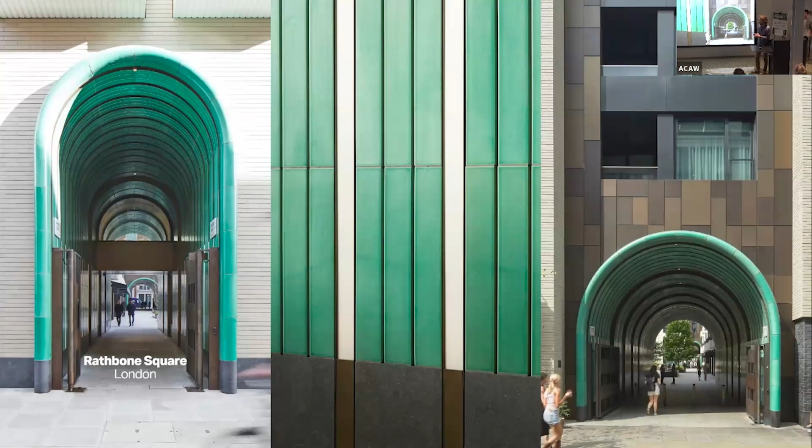The conversation with Boston Valley started a few years ago when we worked with them on a project in London. We've worked on a couple of projects with Boston Valley directly. This one is in central London, part of a multi-use scheme which is residential, called Rathbone Square. Boston Valley developed these amazing arches alongside our team in London. It's also part of the Facebook headquarters in London, an interesting mix of residential and office, based on a courtyard design, and the two tunnels are amazing public gateways into those spaces. It's a super popular lunchtime spot now, and everybody stops and takes Instagram photos.

On the other side of the world, we've also worked with them on a heritage refurbishment called Shell House, in Sydney, part of the wider Brookfield Place scheme which includes a tower, with a train station beneath. It's highly complicated - this was a facade retention scheme for the heritage asset, and the faience was where Boston Valley's expertise was brought on board. We've worked with them across the world, and it's nice to come here and see their facilities - that's been a great opportunity.

This is the crack team: myself, Jack, we've got Nick and Andrew from Make, and then we've also got Georgina and Luca from Arup. Georgina's here, but sadly Luca is not. We had a lot of fun.

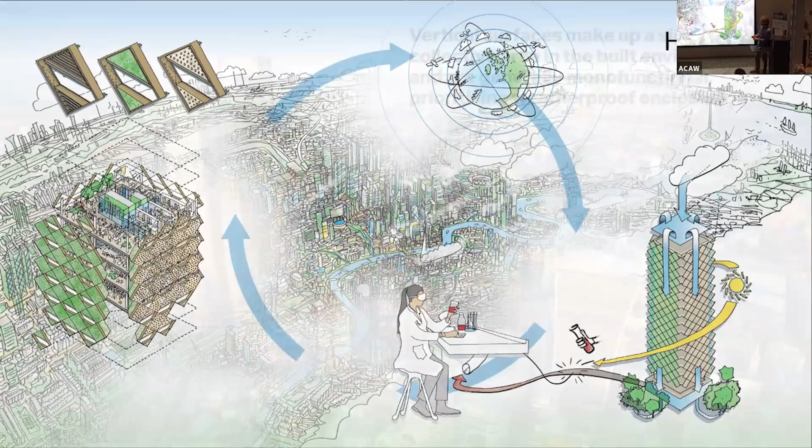As you've heard this afternoon, vertical surfaces make up the vast majority of our surface area in our cities - this is central London now. What if we could do something with those vertical glass and brick and all types of facades, and whether we could use that productively?

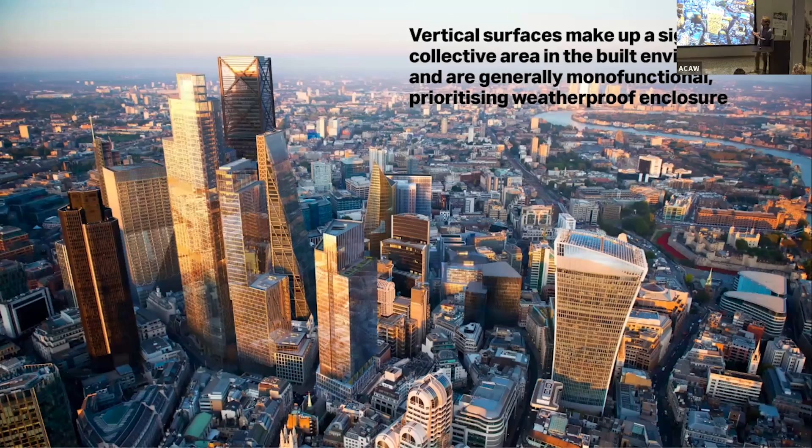On top of just gathering water, could those be elements that enhance growth? In the UK, we're having a lot of conversations about urban greening at the moment, and it's being encouraged - it's a planning policy where we have to hit a certain amount of greenery on facades now, essentially. So can we cross those two together, looking at water retention, which encourages growth?

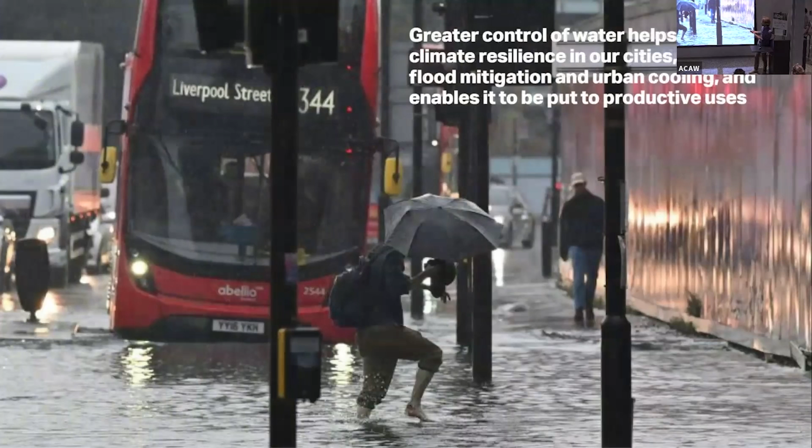This is just your normal Tuesday afternoon in central London at the moment - it's nice to be here. So it's basically, can we mitigate stormwater runoff to stop having our Tuesday afternoons like this?

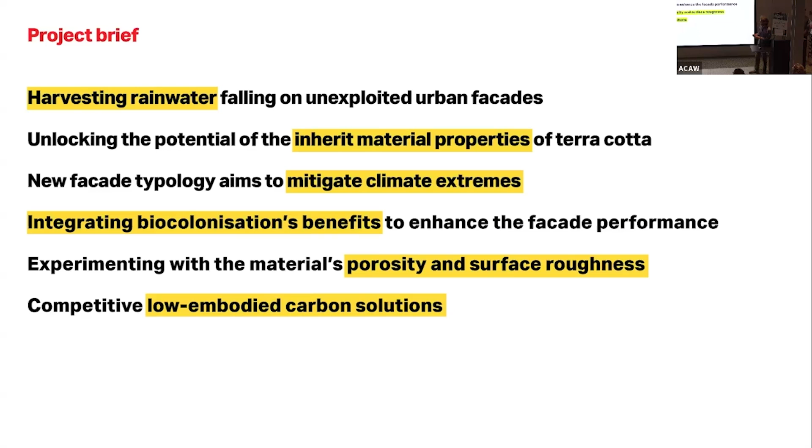The project brief we sent over to Boston Valley was basically: what can we develop that looks at harvesting the rainwater, maximizing the inherent properties of terracotta, whether that's using glazes or not using glazes, to create a new facade typology that can start to mitigate against some of these effects and passively encourage greening potentially - looking at porosity and glazing as a binary system, which you'll see develop.

Delving into the research now.

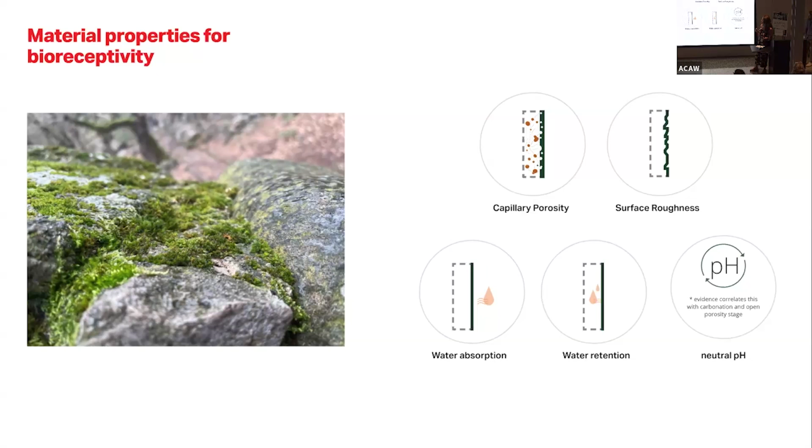While working on the hydroskin concept that we started with Make, we started delving into bioreceptive materials. For those who have never heard the term, it's the ability of materials to be colonized by microorganisms. How do we, as designers and architects, steer this biogrowth and control it? By engineering a set of material properties, we first need capillary porosity for the water to be absorbed and retained. We also need a neutral pH, which since terracotta is a natural material, we are good to go with. Our team also focused on the treatment of the texture and the surface roughness.

What helped me inspire Make was my personal research thesis at TU Delft not long ago, where I had the idea of creating porous glass through foaming, so that mosses and microorganisms could colonize it. The driving reason was to incorporate glass waste streams that are currently being landfilled. I created these samples, soaked them in water, dried them, checked their permeability, crushed them, and after leaving them at the Botanical Garden of TU Delft for even 6 weeks, I actually spotted life on them. That was one of the most exciting parts.

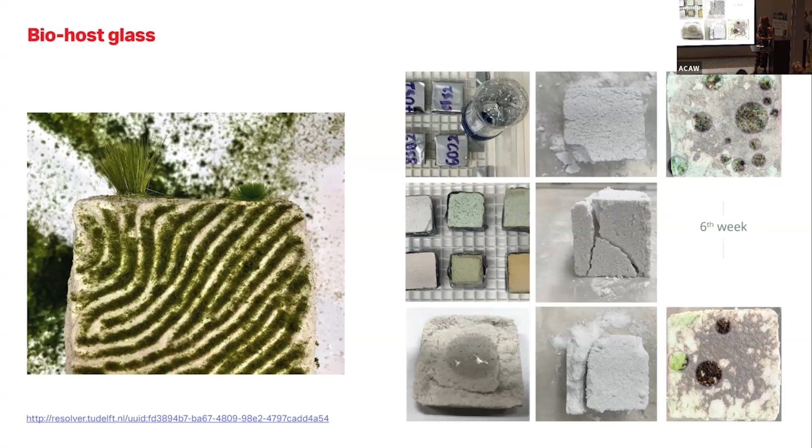That's how all this knowledge helped me when we sat down with Make and started asking ourselves: how much water can our facades capture? How can we answer that?

We set out a strategy of specific steps, first gathering weather data, the precipitation levels of each area, to know how much water falls on any location where our building is. Then we need the orientation of the surface of interest, which goes hand in hand with wind and radiation levels, because the prevalent wind falling onto the building surface actually has the force to change the rain trajectory and enable water to fall on our buildings.

Contrary to some people's belief, on vertical facades water doesn't fall from rain as much as when you're on the streets. We also need the radiation levels, because we need to answer how much solar exposure we get and what kind of microorganisms will eventually grow.

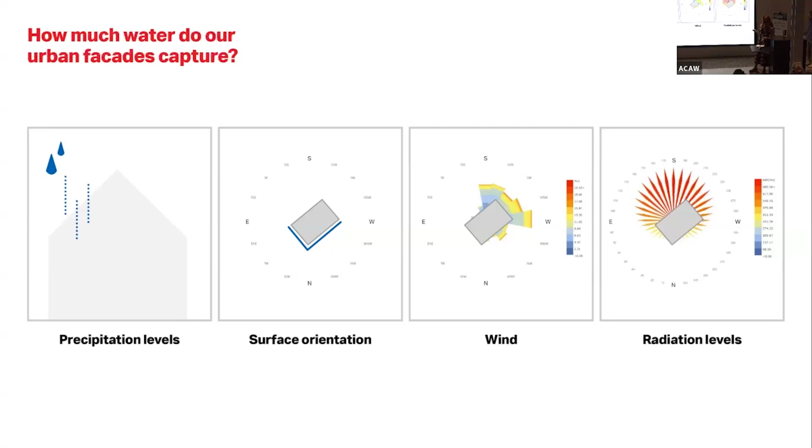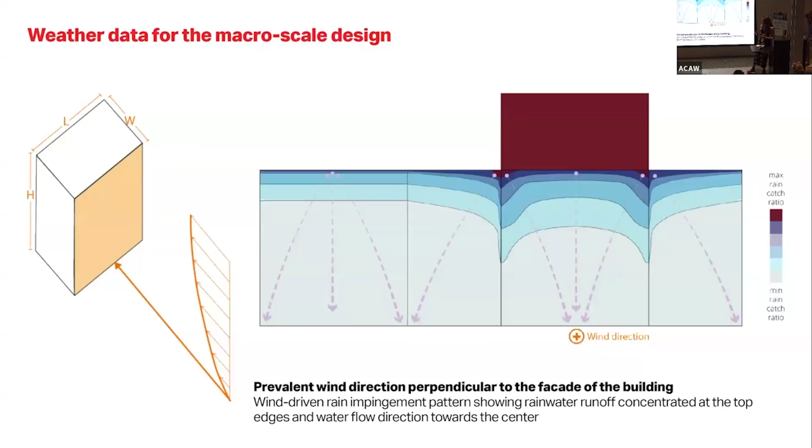This is another case where we have a more homogeneous pattern, because the wind falls on the main facade.

Combining this with previous research already done at TU Delft by Cassie, who explored bioreceptive concrete experimentally and did CFD analysis on horizontal microgrooves, we could tell which was the optimum design and optimum ratio of depth and height to get as much water absorbed and delay the water flow.

After all this, we arrived with certainty at a set of new design principles for bioreceptive materials. Primarily, we want the surface sculpted so there's continuous water flow. Then we have horizontal microgrooves, which are super important for microorganisms to anchor themselves and attach to the surface. Finally, we remove the fire skin of the terracotta to enable the inherent porosity of the material to absorb water.

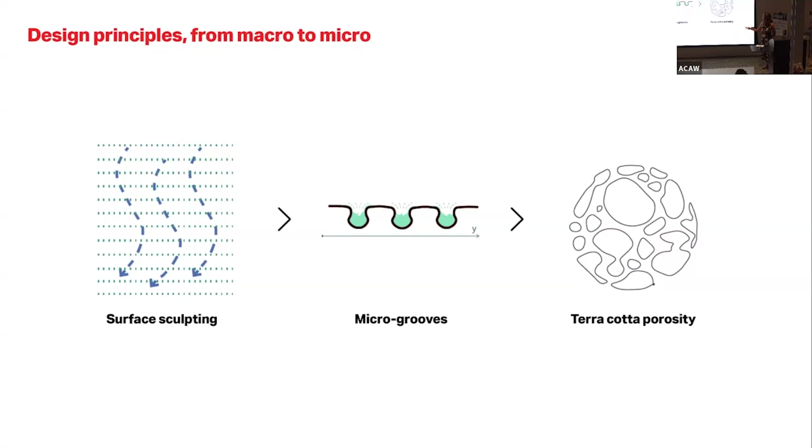And finally, I hand it over to Andrew. Thank you. Maybe stay away. I'm not going to.

Hi everyone. So we took all of that amazing research and started looking at how it could be translated into terracotta. Even from the earliest studies, we always wanted to look at something relevant to both new build and retrofit applications, so you're probably not going to hear too much from us about the substrate. That's intentional. At the heart of the form is this idea of controlling water, but we want to do that in a really beautiful way, and I don't just mean aesthetically.

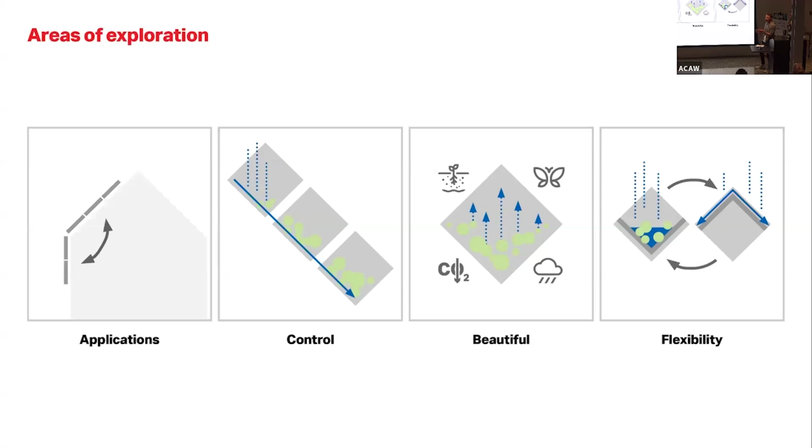We also want to make a positive contribution to the natural environment and also deliver something that's topologically optimized, so it's as low embodied carbon as possible. We're also really interested in scalability, so trying to minimize variation, but look at single elements that perhaps just by way of how they've been oriented can provide different functions, so inherent flexibility in that.

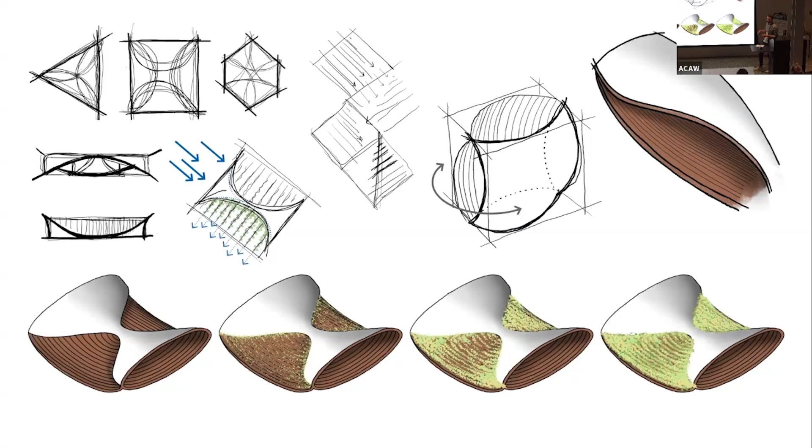I think these were some of the earliest sketches that we shared with Boston Valley. You can see here we were initially exploring these hourglass forms, looking at, one side might be glazed, the other side might be quite rough. Maybe it's got these open ends that can collect water. A glazed surface that can track the water, and then this rough surface that encourages the biocolonisation that Georgina mentioned.

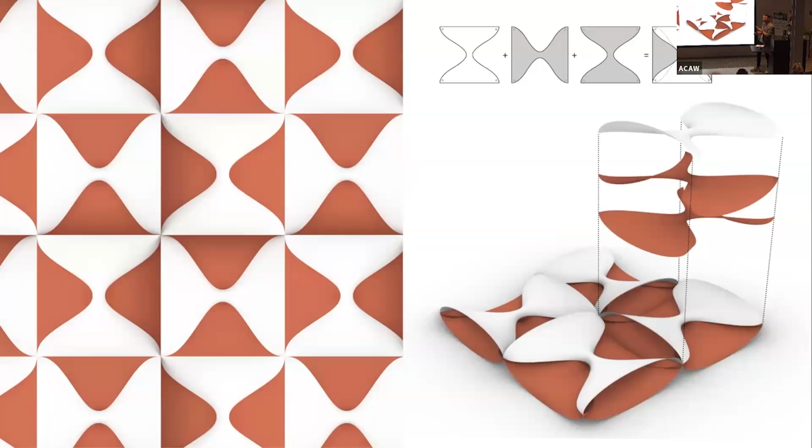But that scalability point, actually, these are really just the same element that can be layered on top of each other and rotated. That then evolved into... is this a different model? One of the issues with that concept, though, was that we didn't feel like we were actually addressing our own brief about directing water.

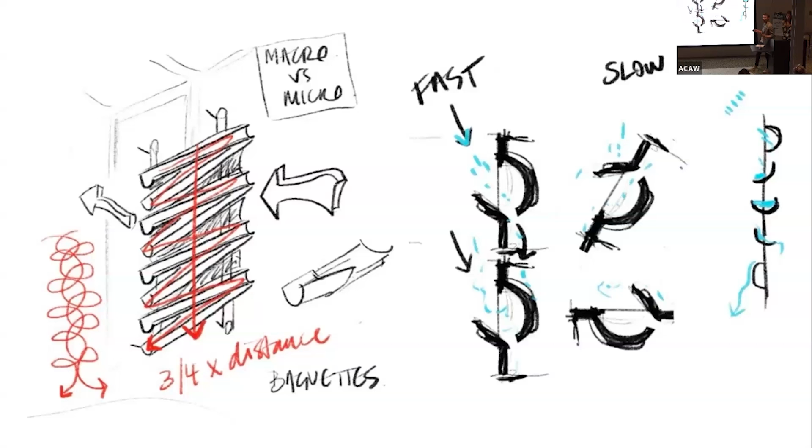So the next iterations really looked at more channel-like forms, so these kind of U-shaped baguettes that could literally direct the flow of water across a facade.

It was really similar, but here we were looking at spherical insertions in the ceramic, which could be oriented one way to reject water, oriented another way to accommodate water, but also, like the last question, this is a great opportunity for accommodating plants or wildlife habitats as well.

Boston Valley really do not like when you try and support ceramic off other ceramic. That was the other killer for these ones.

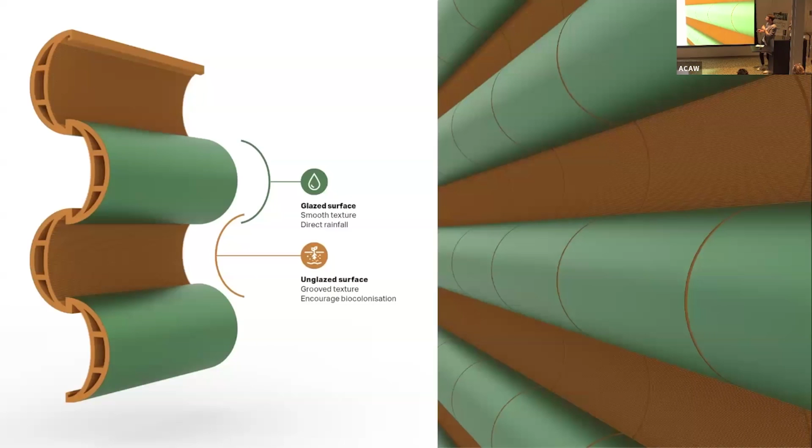So back to the point about trying to direct the water, we sort of evolved to something more like this, where again you can still see we're holding on to that concept of alternating the glazed and unglazed. In this case, a slightly more conventional convex concave form.

But even in this really early graphic, you can see that we're being quite rigid with the horizontal. So actually being able to deliver something that's highly responsive to quite specific climatic conditions, this is not really doing that. So we started to try and introduce a little bit more variation in this.

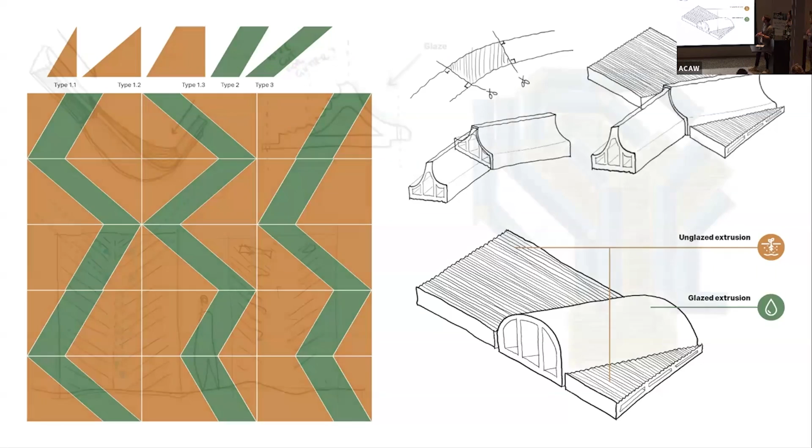Again, Boston Valley were amazing in making some suggestions to set us off in different directions. So in this case, we were looking at only using extrusions, and all the variation comes through cutting them at different angles. That started to raise questions about material waste and things like that. But even within that, we started to get a little bit more expressive, and that really did lead us to the final concept that I'll talk through now, if it's going to work.

Slightly nervous now. I do have faith, Georgina.

There we go. So it starts with the water flow, all about these ridge lines, these highly glazed elements that direct the water. That water then seeps into these island panels in between.

So these are the really rough, unglazed panels. They have the grooves in them so that when it rains, that's where we really get our biocolonisation to take hold. It is a really expressive pattern, we think, but it's still highly modular and highly repeatable.

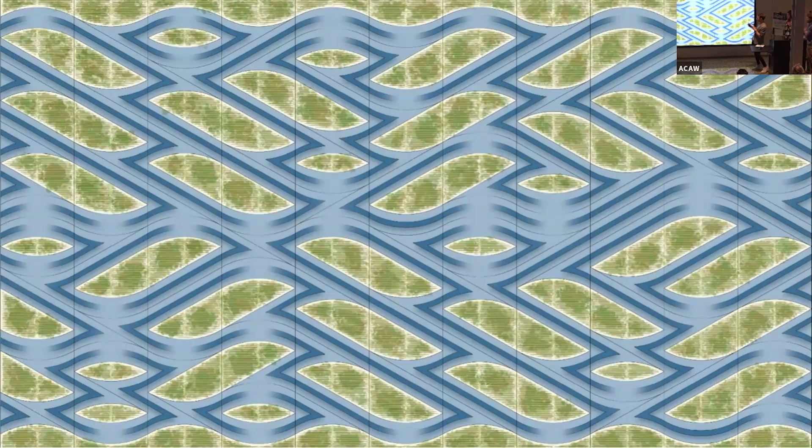Actually, this expanded vocabulary is 10 parts, 5 for growing, 5 for water direction. Boston Valley were kind enough to produce 4 different types for us for the mock-up, which gets us to that panel that you see today.

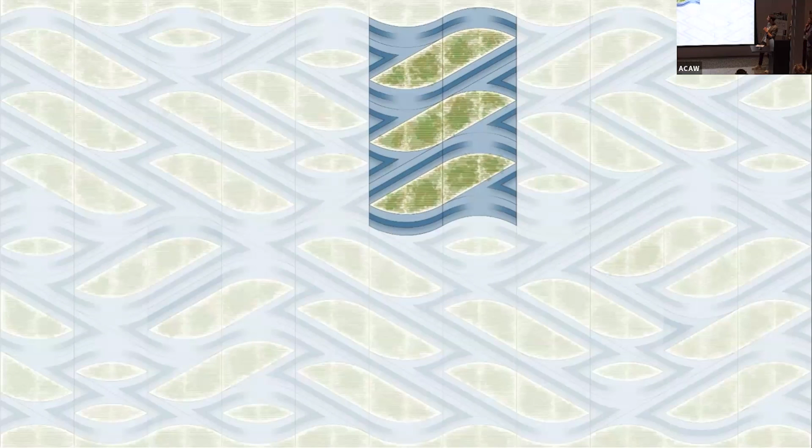So now that we have a strong concept and we have a shape that could work on it, we need to try and build it. And the first step is to model it, but always trying to understand or take into account how the material actually behaves. How is it meant to be built?

So I took notes all day and I almost lost them. There you go. Sorry.

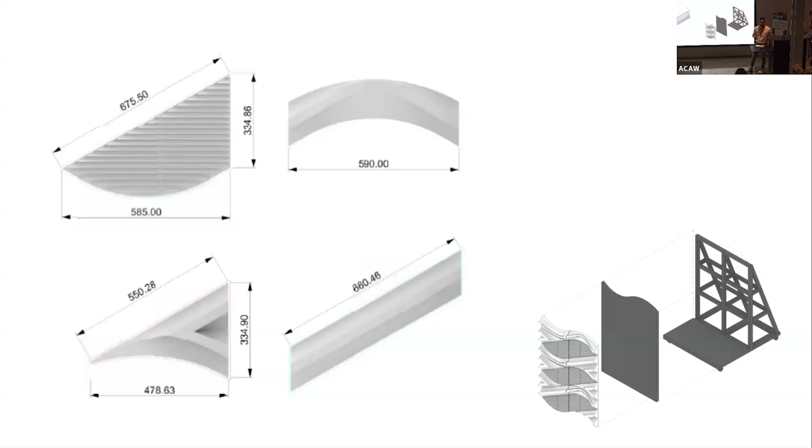So one thing that we always need to consider is that this is a visual mock-up. So if we try to describe these pieces, they would be different from a full production model. The pieces that we see here today and on the screen are on a scale of 1 to 3. However, the pattern that we optimize using all your research is actually 1 to 1.

In a full-scale production model, we're thinking we can make these pieces out of extrusions, the growth pieces, and the triangular shape. I don't know how to point.

This one, which is actually an intersection of the other two, would be a pressed piece.

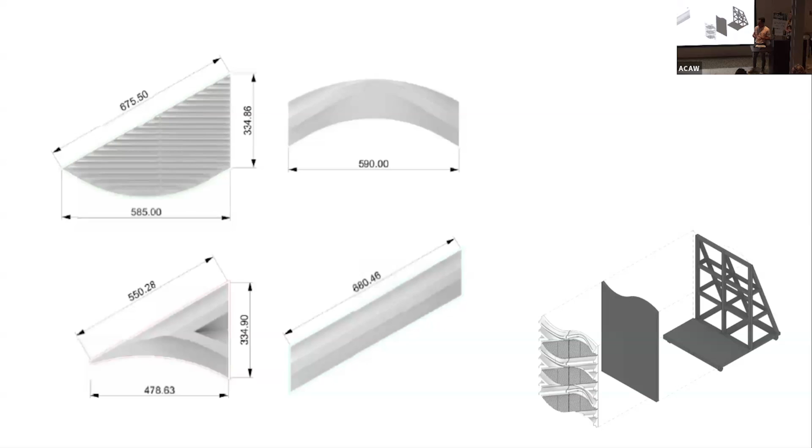So as you saw in the main pattern, we are achieving what we think is a high degree of variation just by configuring a very limited number of pieces, which is always a nice thing to tell to your client, I guess.

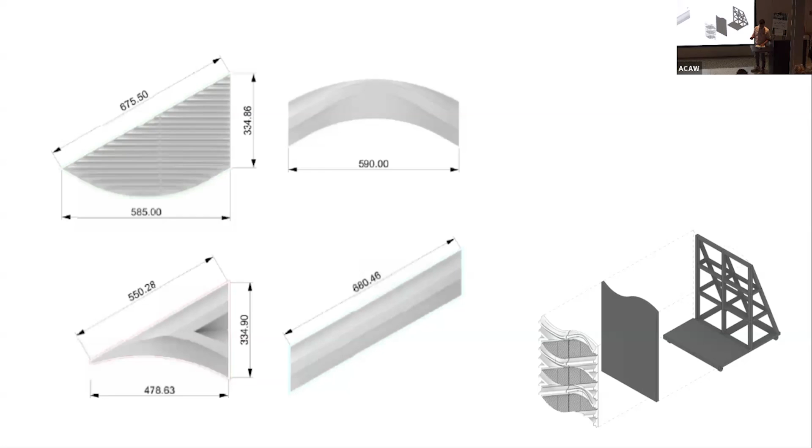This is our initial setup where we were thinking how to hold the piece in place. This is part of our study, and this is the assembly that we settled on. But we studied multiple ones to check which one was more representative of our concept and which one optimized the number of pieces that we used.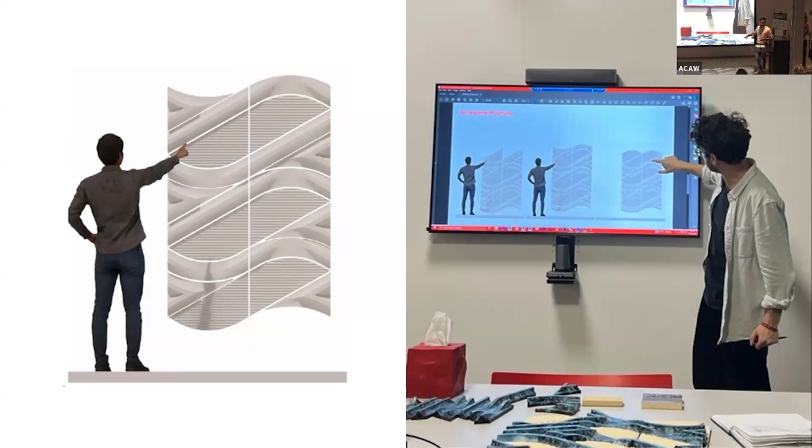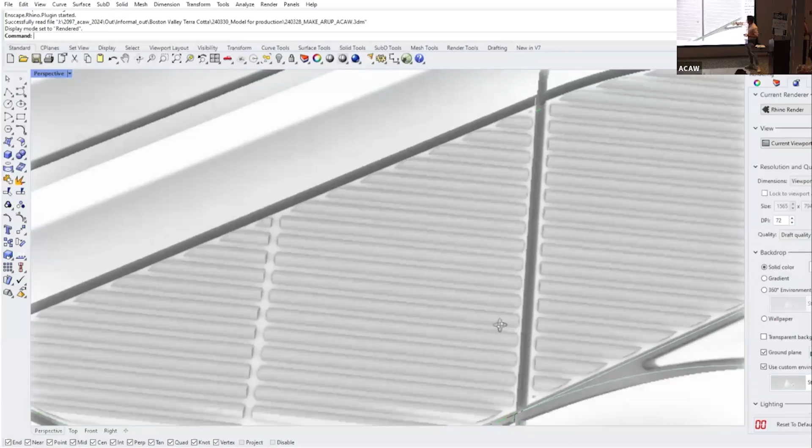We 3D printed a lot of them and had a lot of fun painting them. This little video shows how the model is actually taking into account some tolerances, how far they need to be apart, how they can be assembled, where is the pattern, and how if we're going to remove the fire skin of this piece, that piece needs to be modeled with a little bit of an extra layer. So the final piece is what we want to achieve.

So a complex system doesn't have to be complicated. It's relatively a very simple model, but it has a lot of small thought put into how it's modeled so it can be produced.

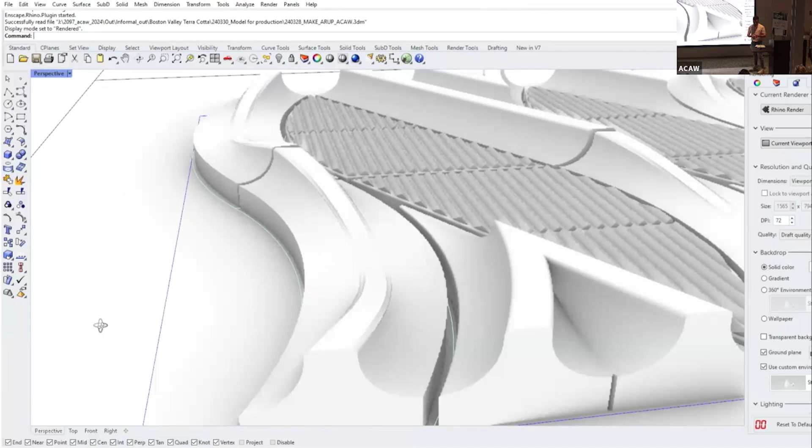After we have this, we start receiving all of this like a box of candies from Boston Valley. I'm sure we all experience the same sensation with a bunch of very, very interesting glaze options.

We settled on a very sleek glaze for the top with this speckled effect that kind of runs over the surface. Talking yesterday with Andy, he told us that effect was very desirable, usually achieved by the use of lithium in the mix, but that is these days very hard to procure.

So our system doesn't use it but achieves the same effect. I don't know exactly what's going on there, but I know a guy that does, and he must be here in the room.

And for the other piece, it's actually just fire, and we remove the first layer of the fire layer as you described. So we kind of like that hard contrast between the two pieces, and we think it enhances the pattern.

And if we imagine this aging and going slightly green, with things growing on it, I think it would be a very nice contrast between a highly sophisticated finished surface and this growth taking hold of the rest of the wall.

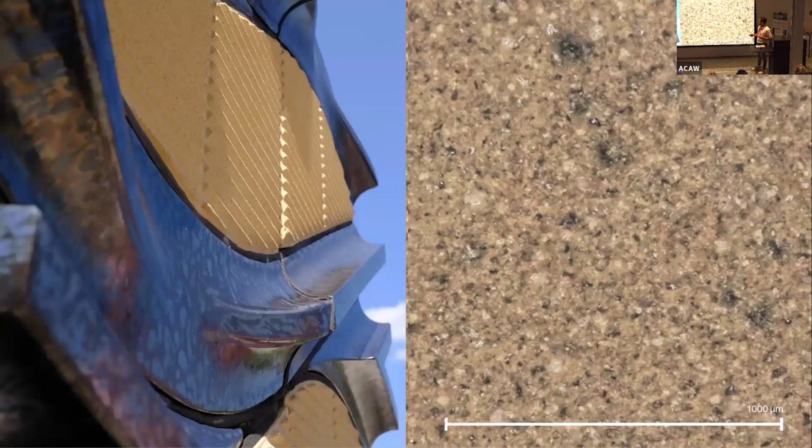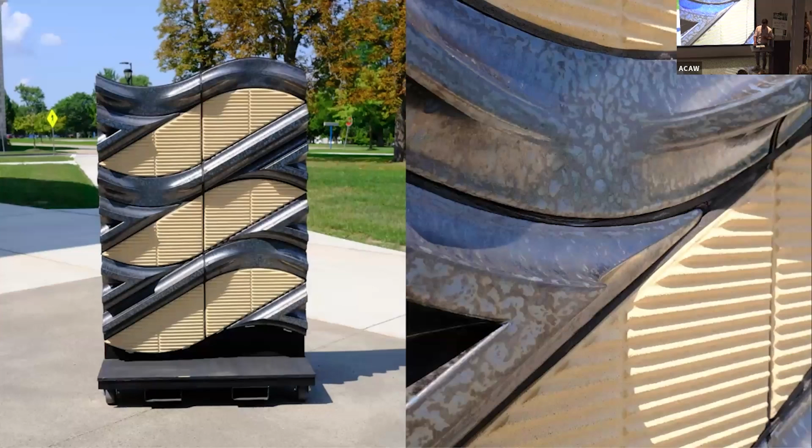Sorry, something that I need to say in this one. A full production model of this system, the way we see it, is a precast system. It's not a rain screen. We're trying to design in such a way that we minimize the use of aluminium.

The pieces would need reworking, and they would be slightly different to work with a precast system. But that's why we have simulated this grouting. The whole concept actually depends on it, because we don't want the water to go into the screen. We need to seal it. And precast is the support system that would enable that.

Something that we also want to explore, or we think is important when designing with terracotta, is trying to match the life or expected life of the terracotta material with the expected life of the support system. Because as we saw in one of the presentations yesterday, it's the weakest link where you need to design for.

I think I talked already too much, right? No. Yeah, yeah. Thanks so much.

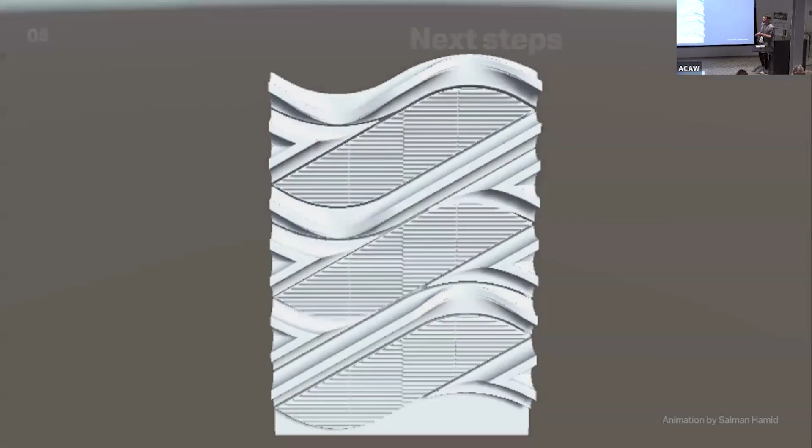So you can tell that we've had so much fun as a team. It's been amazing to be here. Clearly, there's still lots more work to come. This was a very tangible output from that initial Hydroskins project that Jim talked about, and we kind of want to carry on that journey. We've taken a very big leap from a theoretical position to a kind of tangible output.

So now we really want to go back and analyze what we've actually done. We're going to try and persuade Boston Valley to let us leave this mock-up outside for a little while so that we can come back and see it in a year's time and actually then compare that with the data.

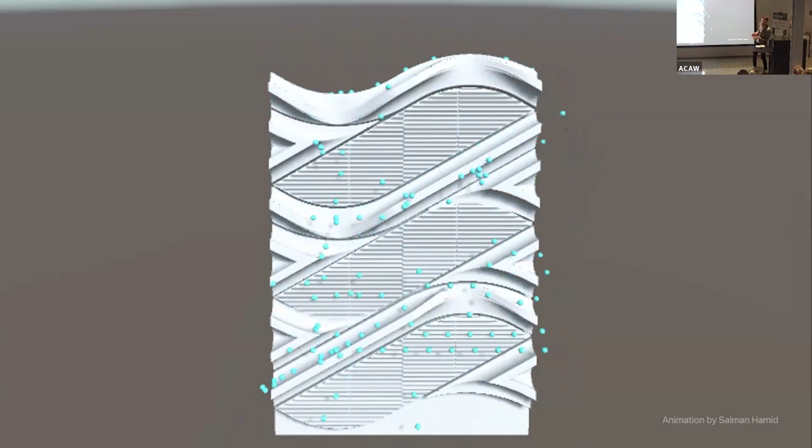If nothing else, we need to also simulate rain that's a bit smaller, I think. It kind of looks like we're throwing snowballs at it. So we're going to work on that too. That is definitely a next step.

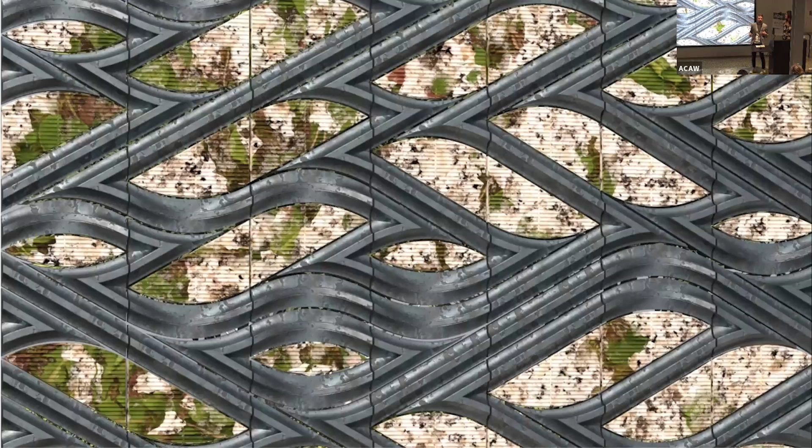But yeah, like all the teams, I think we're really excited about actual real world project applications for this. I talked earlier about this expanded vocabulary of parts. So how do we deal with openings? How do we deal with buildings generally meeting the ground in a straight line? How do we kind of deal with that? So lots more development to come, but we're just so excited to carry on that journey, I think.

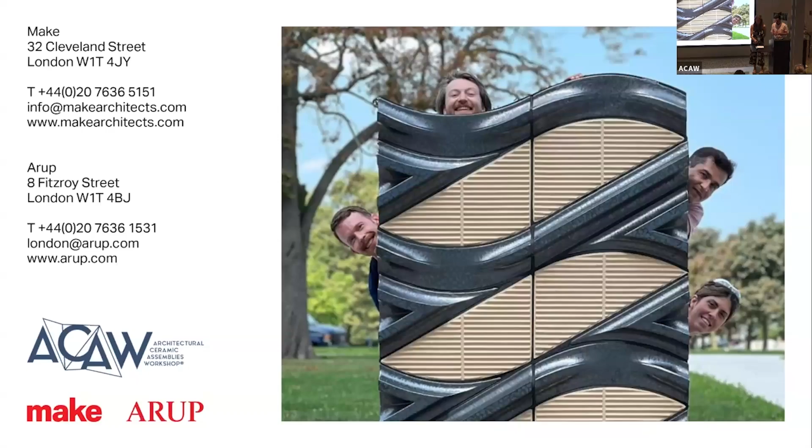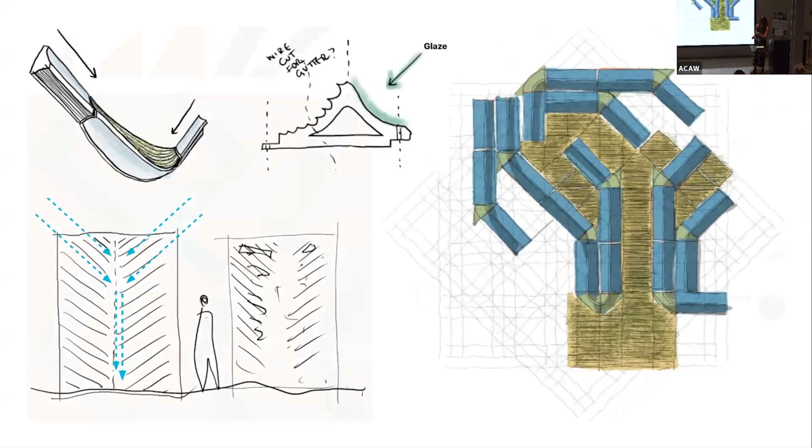I think also these diagrams - I don't know if I'll go there easily - show the water zones of the building envelope. They could immediately tell where growth will start first, and by the time... actually it will take more than 6 months. Yeah, this kind of diagram. But since I managed to get moss on glass, on foam glass, we can certainly have it on terracotta. Okay, thank you very much. Yes.